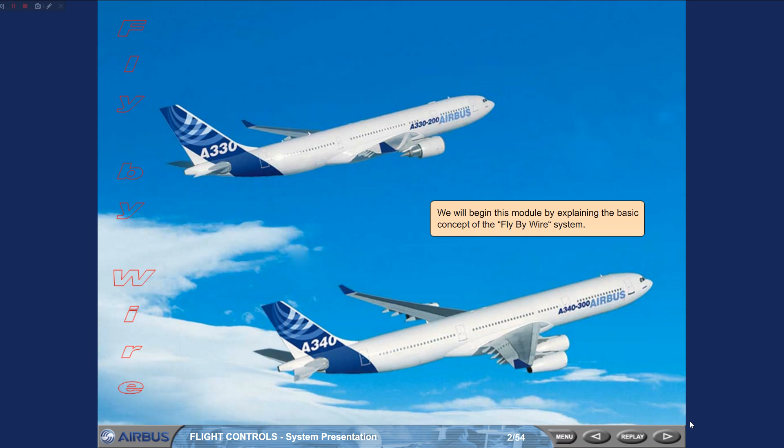In conventional aircraft, the movement of the control column is transferred along cables and pulleys until it reaches the control surface to be moved. In the A330 A340 family, the cables and pulleys have been replaced by electrical wires. This has the advantage of saving weight on the aircraft. However, there are even greater advantages, as the video clip will demonstrate.

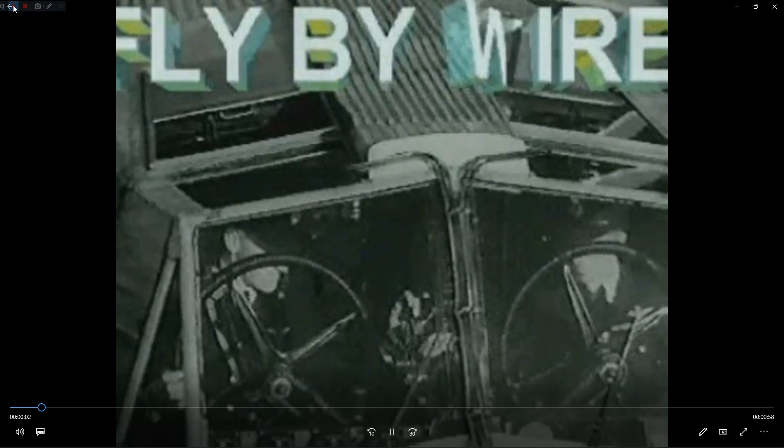Now the way became clear to reassess the mechanical linkages, transferring the control commands to the electrically actuated hydraulic motors that work the flying surfaces.

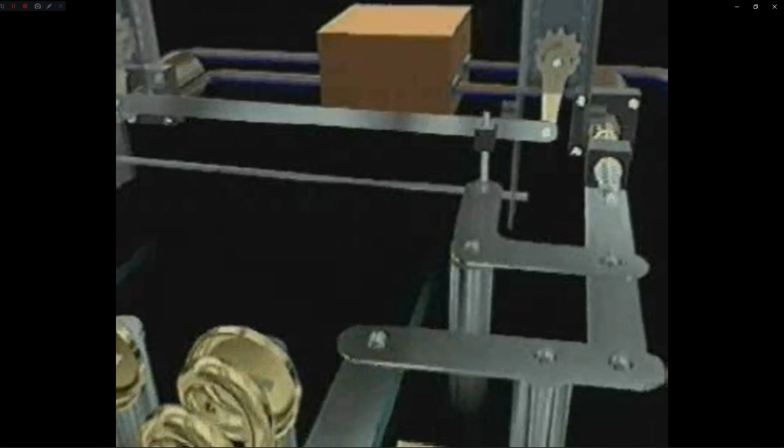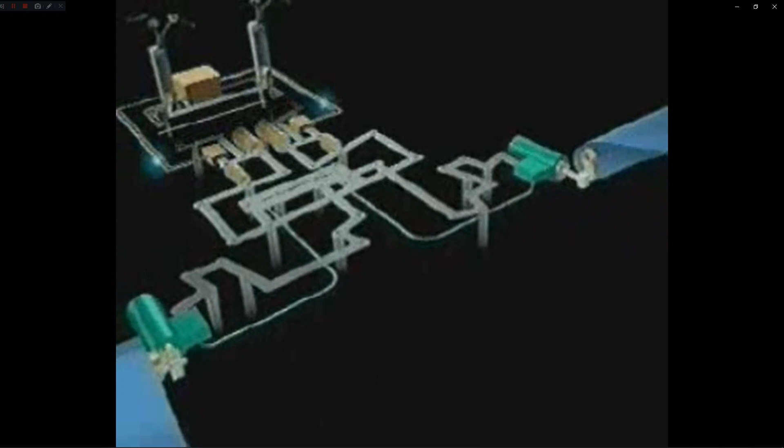As electrical signals were already being used to control the motors, the logical step now was to send the message to them direct from the control column by electrical wire, resulting in a far simpler and lighter system. And without the need to exert muscle power, the conventional control yokes could be replaced by small side sticks.

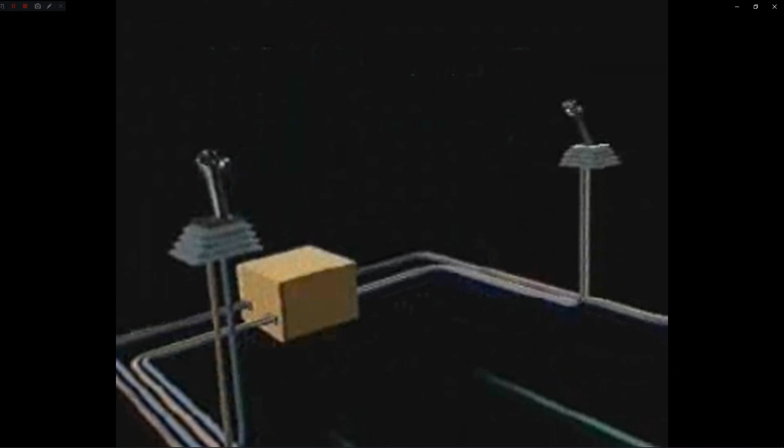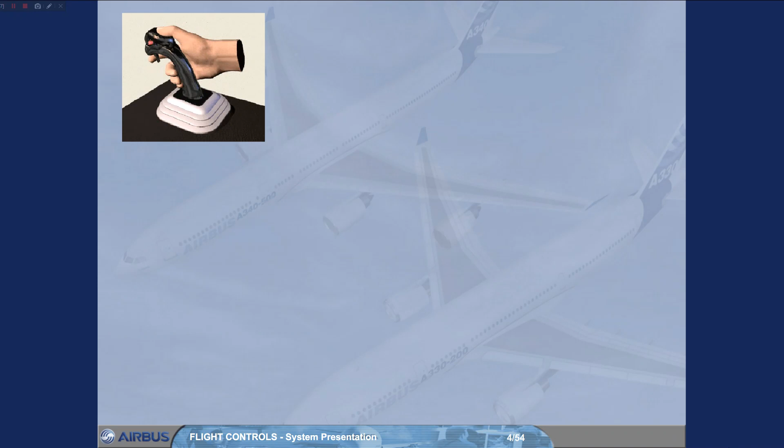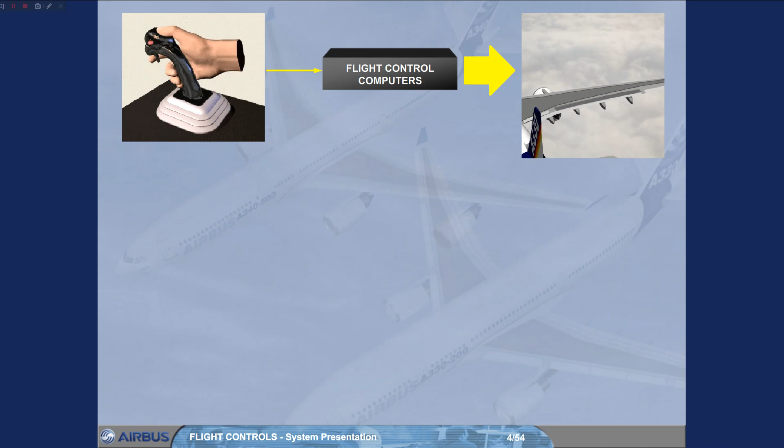The electrical signals, created by side stick movement, travel through flight control computers before being transmitted to the surface hydraulic actuators, also named servo controls. These computers analyze the signal to check that it is a safe command and ensure the optimum flight control surface deflection for the demand.

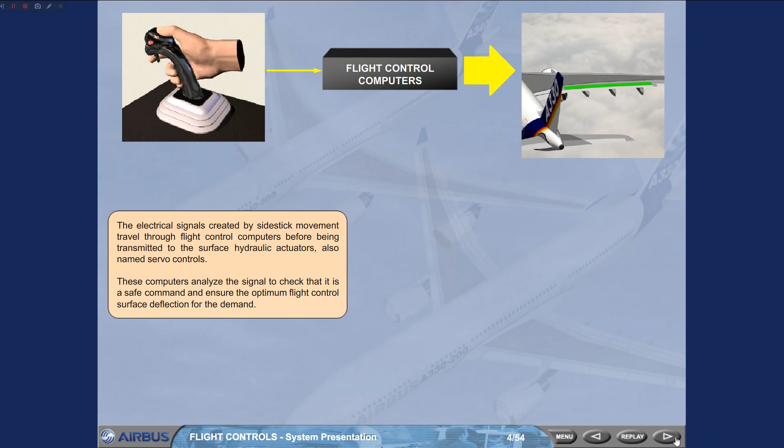This has advantages over conventional systems. It makes the aircraft extremely stable, enhances safety, reduces the workload of the pilot.

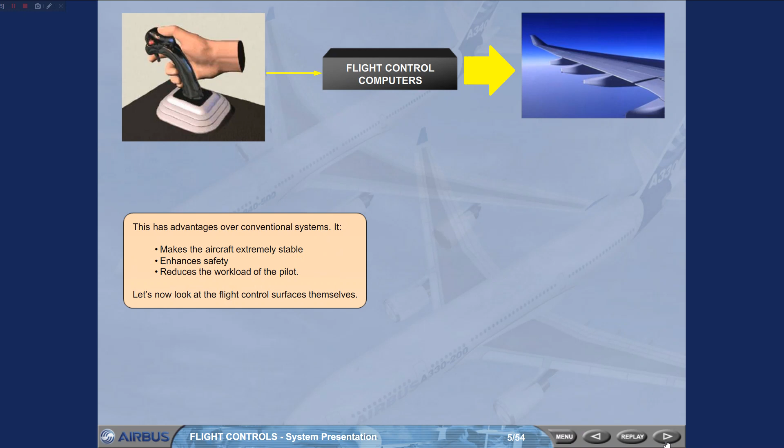Let's now look at the flight control surfaces themselves. The flight control system includes ailerons, elevators, a trimmable horizontal stabilizer, THS, for pitch trim, a rudder, ground spoilers, speed brakes.

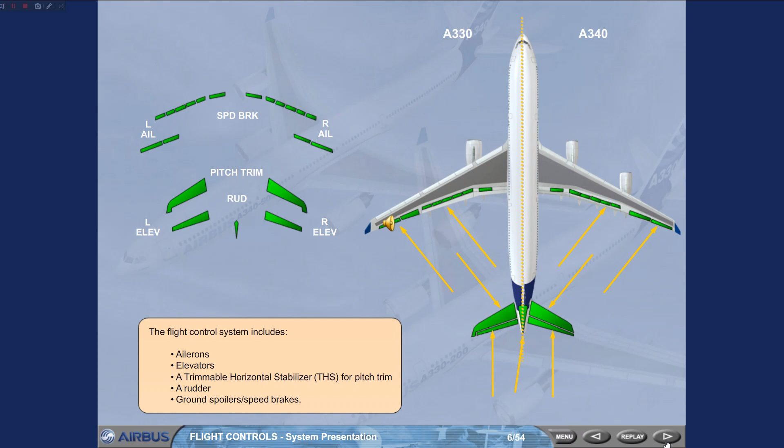Now let's introduce the ECAM flight control page. You can see that all the flight control surfaces we have talked about are displayed. We will now see them in more detail.

The movements of both ailerons and both elevators are symbolized by a green index moving in front of a white scale.

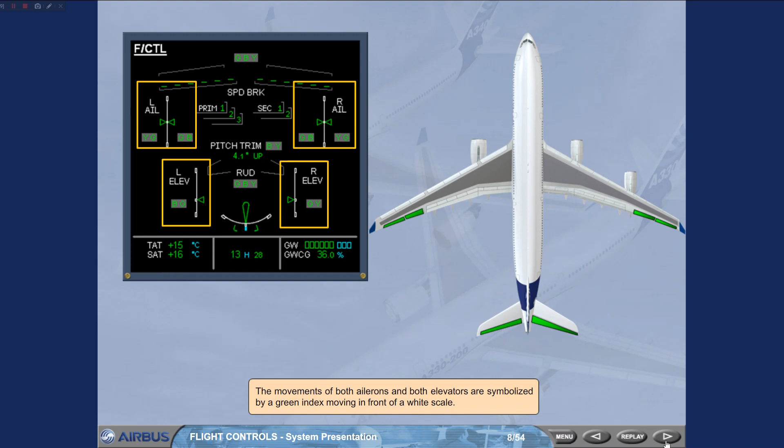The green rudder symbol is used as an index to display the movements of the rudder on a white scale. The rudder trim is indicated by a small blue line below the scale.

Note that the rudder and the pedal deflections are limited as a function of speed via a rudder travel limiter. The high-speed position is indicated by small green lines on the rudder scale.

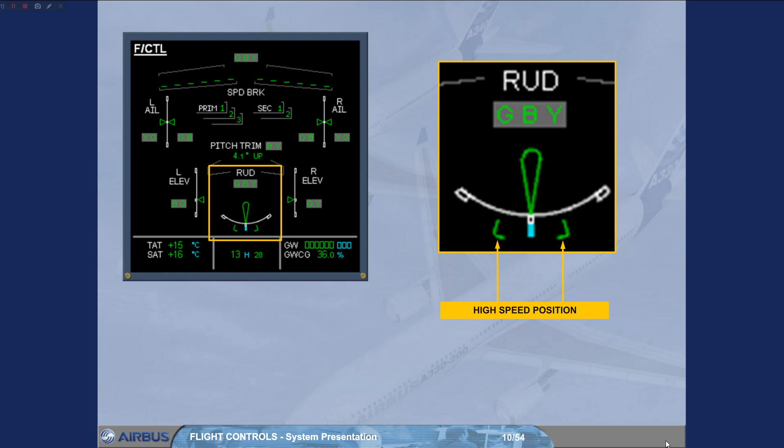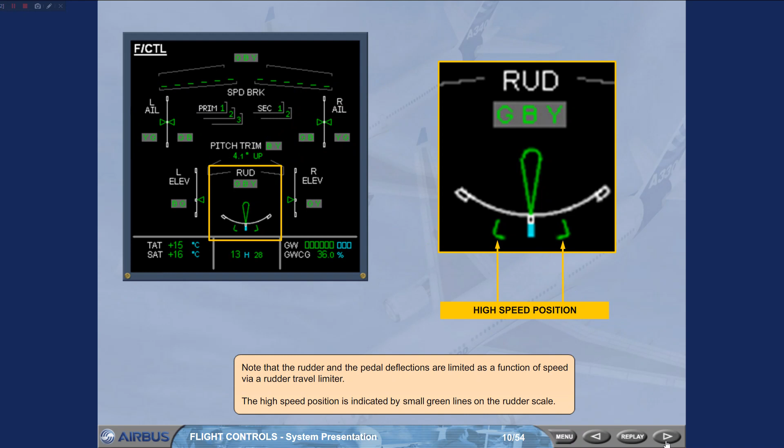The pitch trim position is indicated by trimmable horizontal stabilizer deflection in degrees up or down.

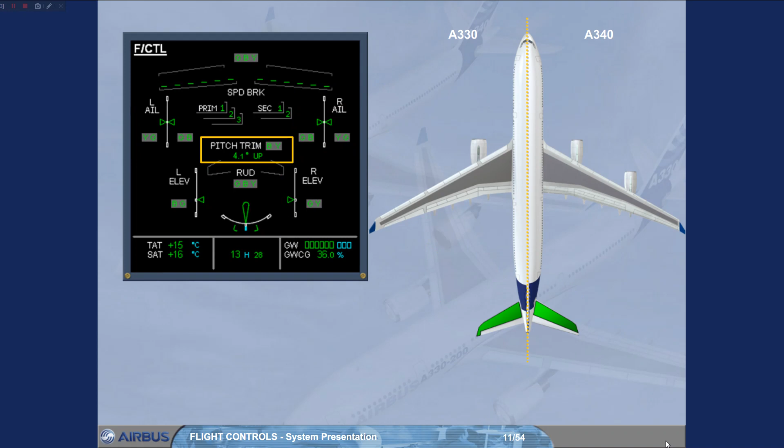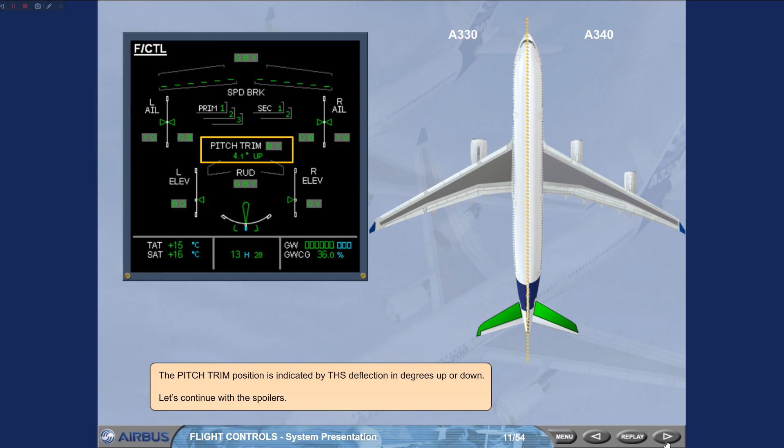Let's continue with the spoilers. The spoilers have several functions. Speed brakes use all the spoilers.

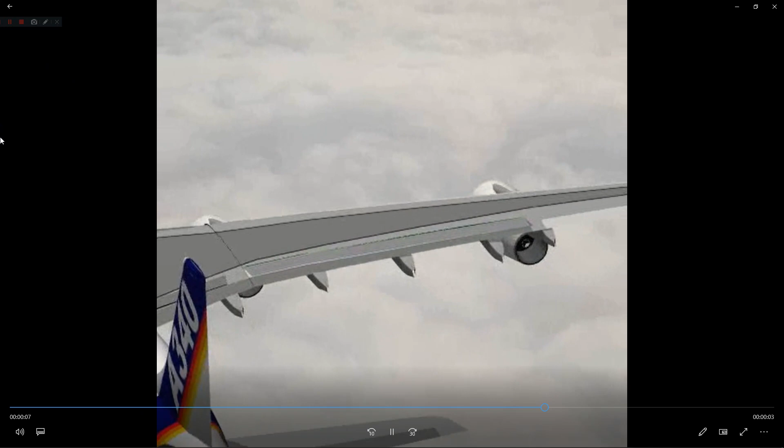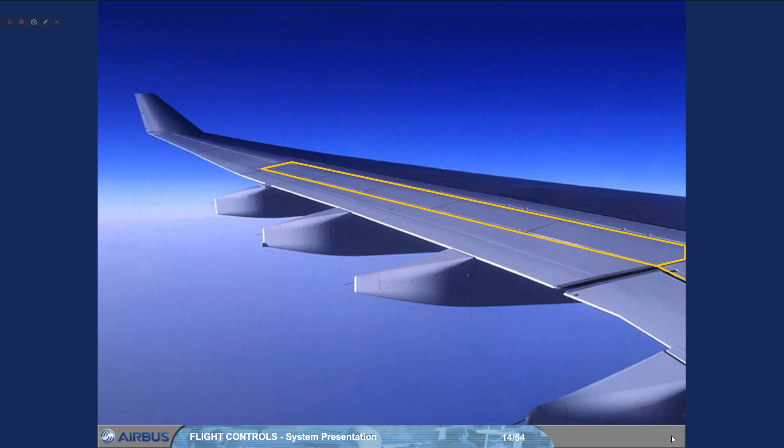Ground spoilers use all surfaces.

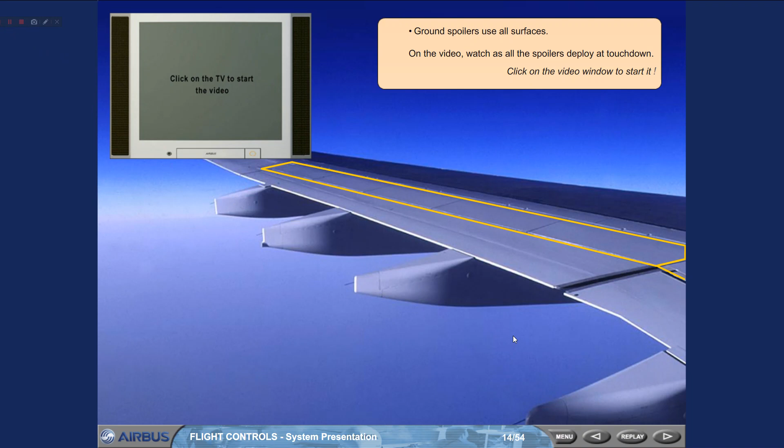On the ECAM flight controls page, the spoiler extended position is indicated by small arrows. This is the case of the speed brakes.

Now, we will look at the flight control computers. The movements of the flight control surfaces are managed by 5 computers. These are 3 primary computers, PRIM, and 2 secondary computers, SEC.

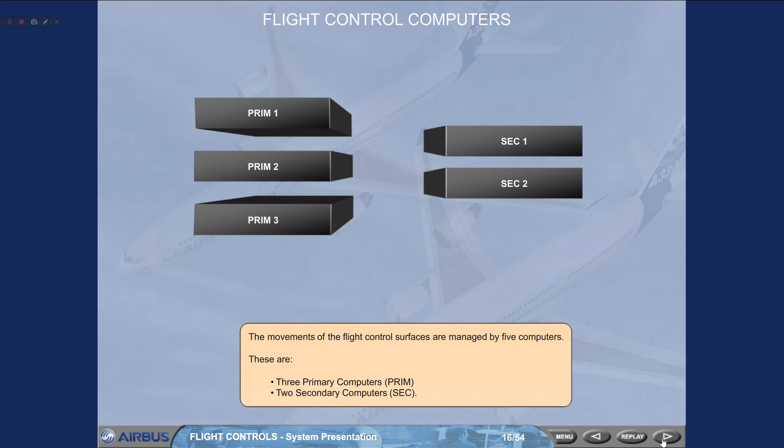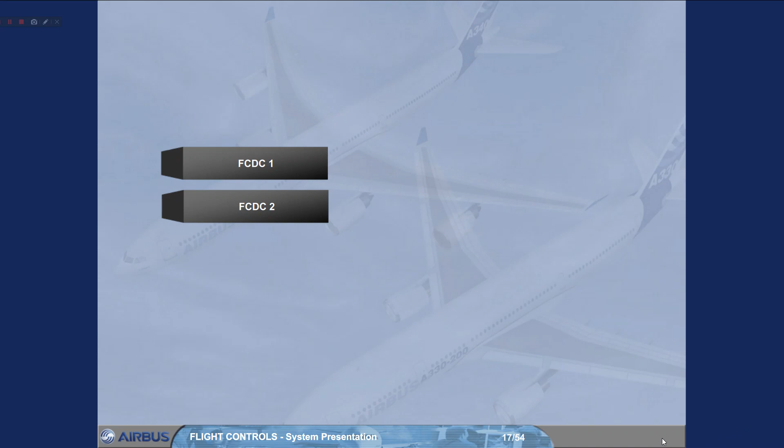In addition, 2 flight control data concentrator computers, FCDC, are used to acquire data from the PRIM and SEC. Then, they send it to the EIS.

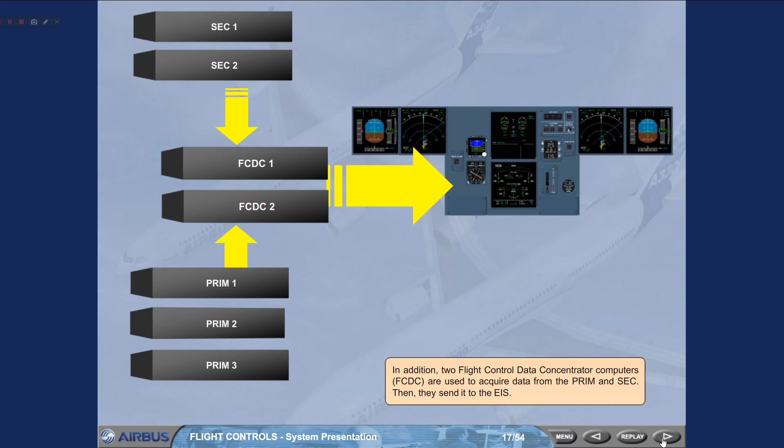The status of PRIM and SEC is indicated on the ECAM flight controls page. The other computers are not displayed.

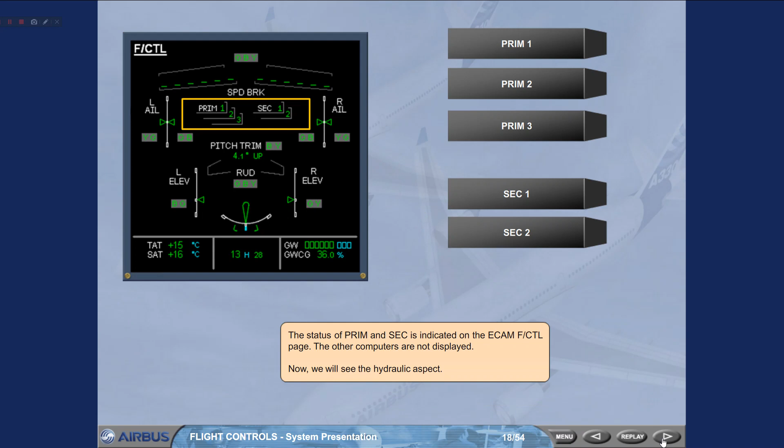Now, we will see the hydraulic aspect. Three independent hydraulic systems are used to power all the flight control surfaces.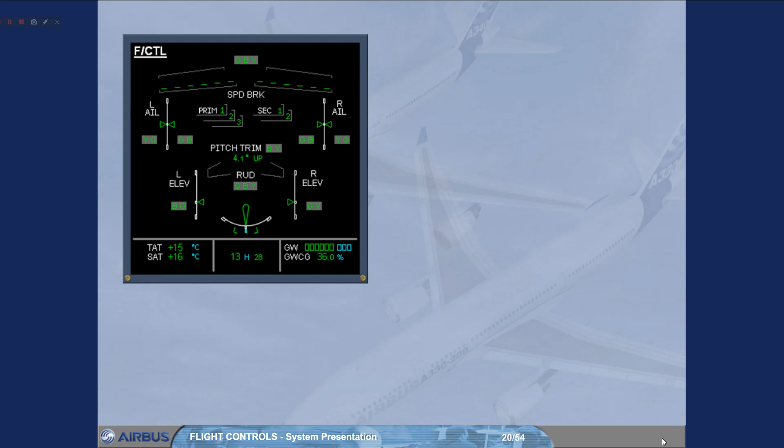The hydraulic systems which actuate each control surface are indicated on the ECAM flight control page by the use of G, B and Y. For example, the rudder is powered by the green, blue and yellow hydraulic systems. The ECAM flight control page is now complete.

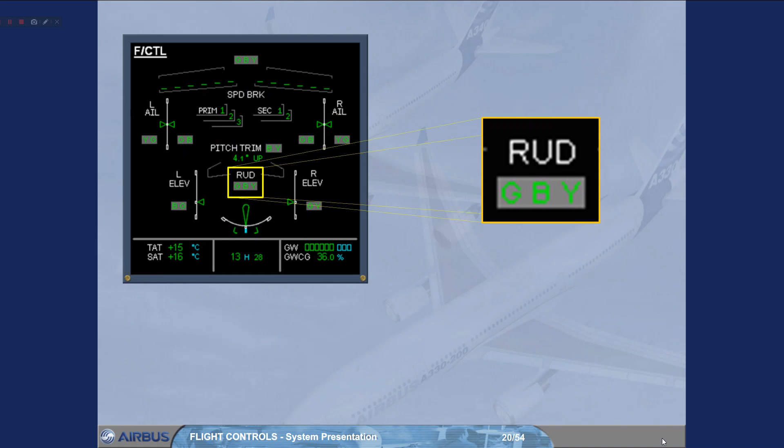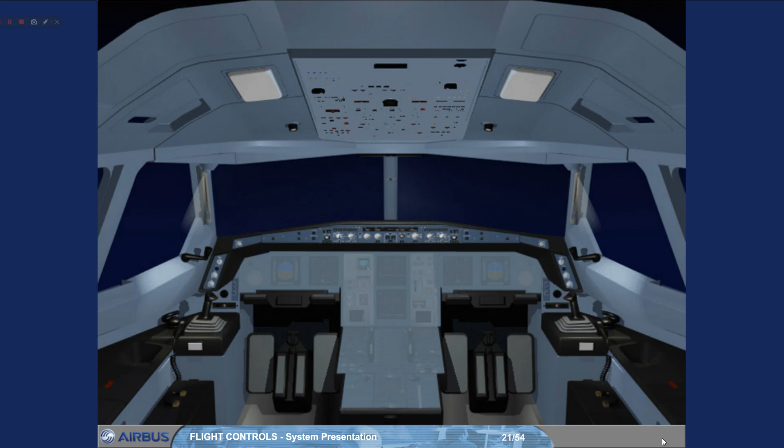Pilots control pitch and roll through 2 side sticks. There are related side stick priority lights. Side sticks and priority lights will be explained in a separate module.

Pitch trim wheels are located on the center pedestal. There are 2 sets of conventional rudder pedals.

A rudder trim panel is located on the pedestal. A speed brake lever is located on the left side of the pedestal. In addition, there are two panels located on the overhead panel to control the flight control computers.

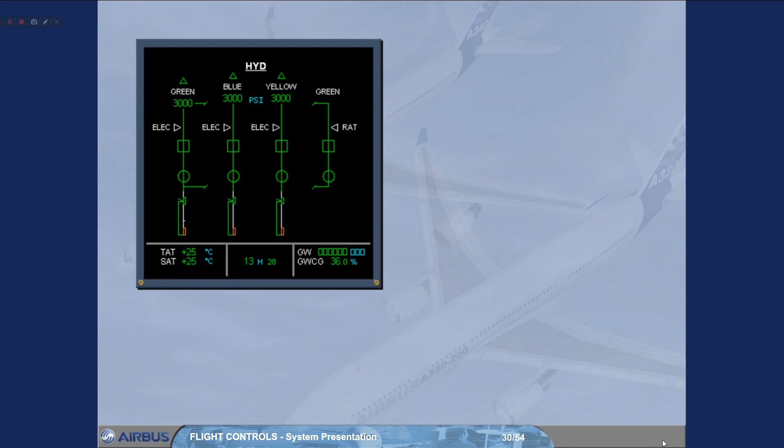The slats and flaps are hydraulically actuated like all the other surfaces. They are electrically controlled via 2 slat flap control computers, SFCC.

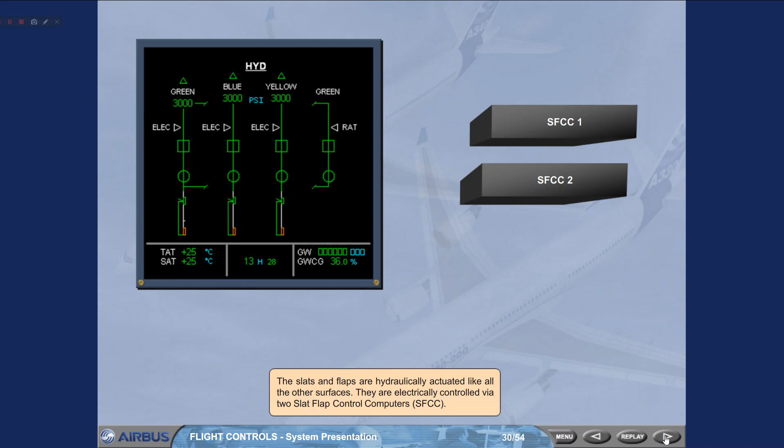Each SFCC has 2 channels, one for the flaps and one for the slats. Each channel can drive its associated surfaces.

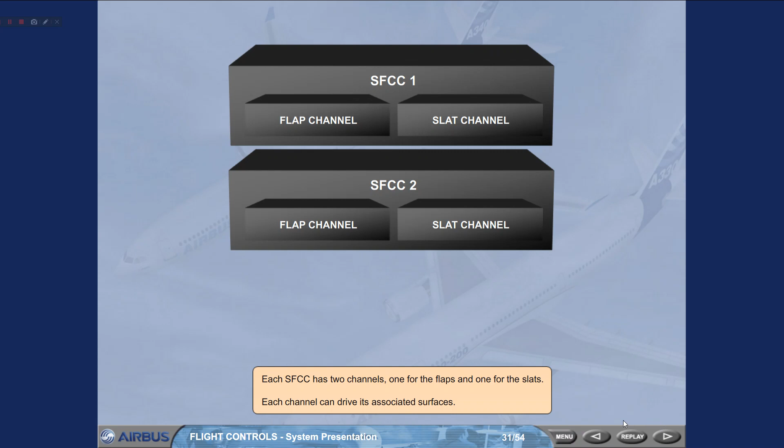The flap lever located on the right side of the pedestal operates the slats and flaps. The flap lever has the following positions: 0, 1, 2, 3 and FULL.

The slats and flaps have protection functions. In particular, surface asymmetry between left and right wing, surface attachment failure, overspeed or uncommanded movement are detected. All these protections will be studied later.

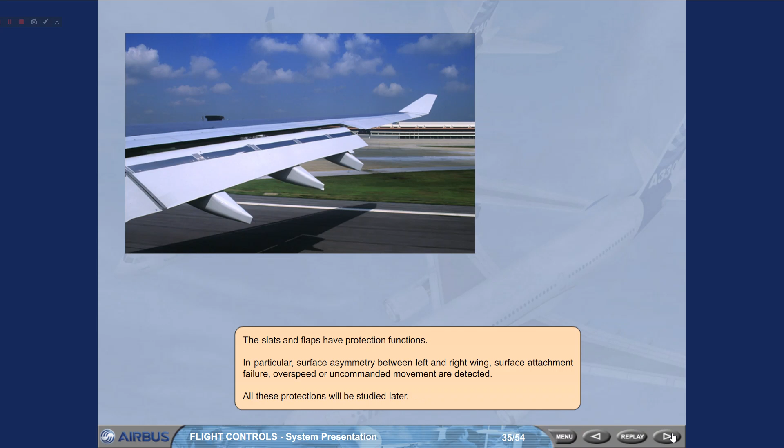Let's review some operational indications. The pitch trim values related to the takeoff CG values are indicated on the scales beside the trim wheels.

After engines start, when the 3 hydraulic systems are available, the takeoff trim is automatically set, calculated by the PRIM, according to the zero fuel weight CG entered in the MCDU, and the fuel distribution. The takeoff trim setting must remain in the takeoff green band range.

Note, on the A340, the takeoff trim is manually set according to the CG.

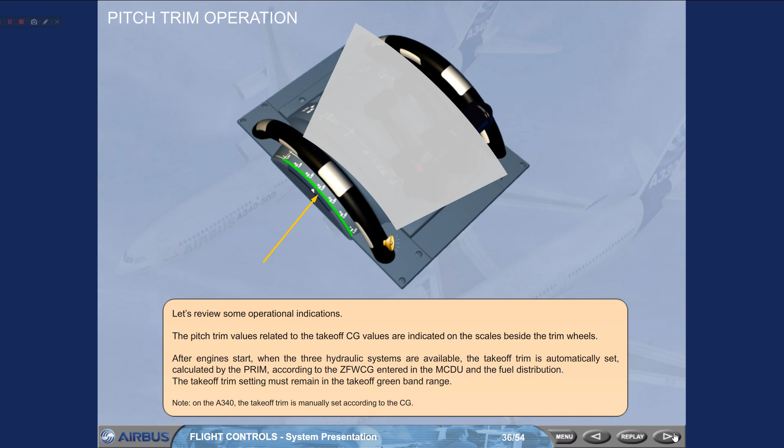The pitch trim position set may be seen on the ECAM flight control page during the flight control check when taxiing, if required.

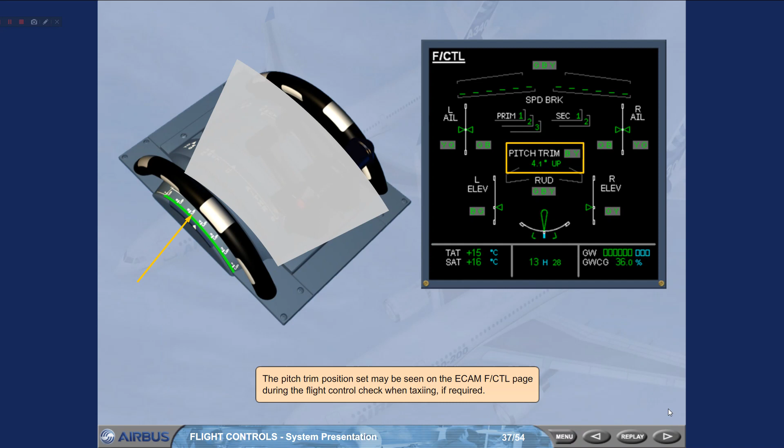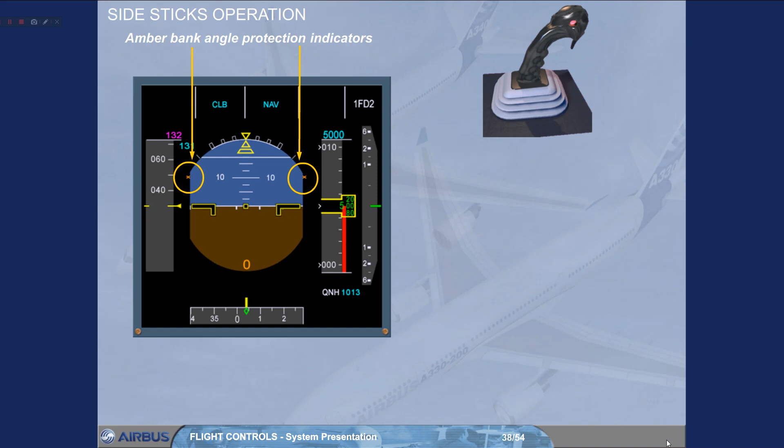Notice that without hydraulic pressure, the bank angle protection indicators are displayed in amber on the PFD. The side sticks are inoperative because there is no hydraulic power. Moving the side sticks will not affect the control surfaces.

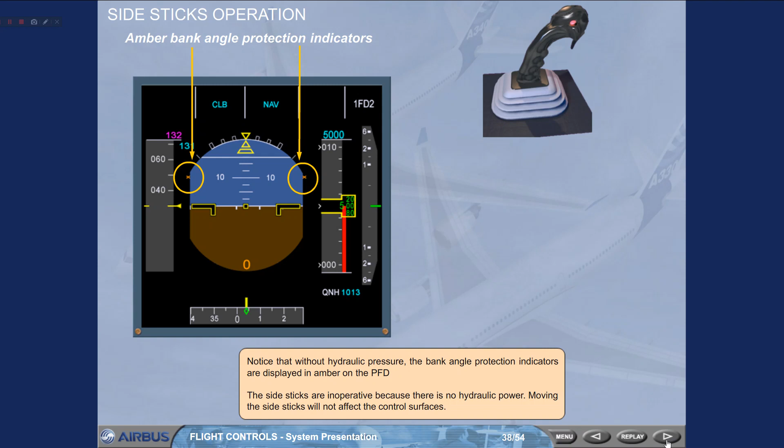After first engine start, as soon as hydraulic power is available, the green bank angle protection indicators appear, indicating normal law. The side sticks become operable.

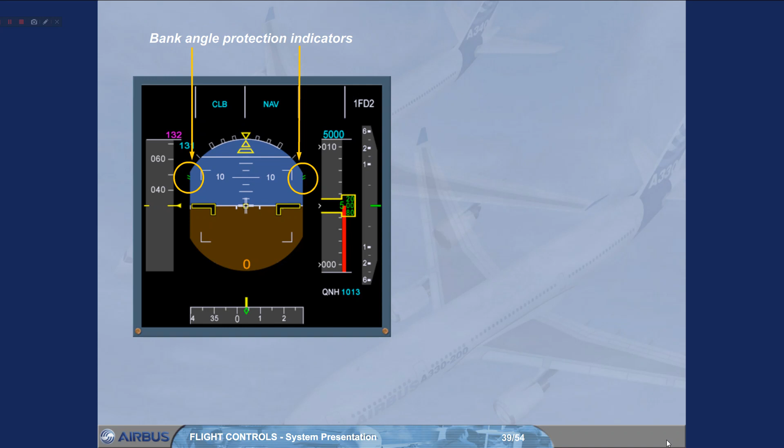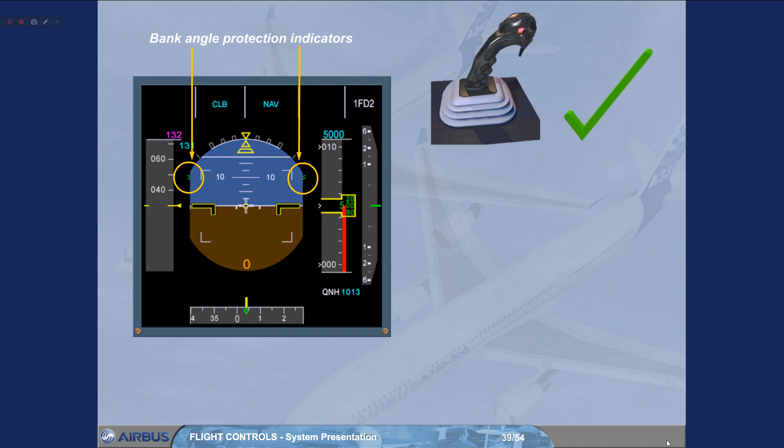On ground, the control surfaces respond in direct relationship to movements of the side sticks. This ground mode enables pilots to check the flight controls. Note: a rudder pedals disc button is provided on the nose wheel steering handle to prevent any unwanted steering inputs during rudder pedals test.

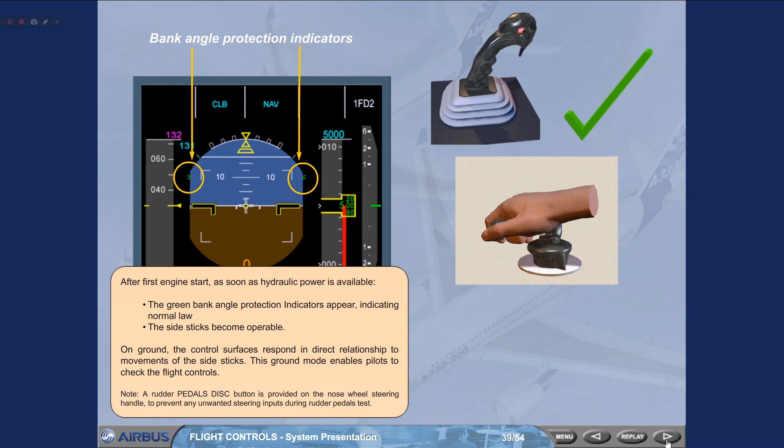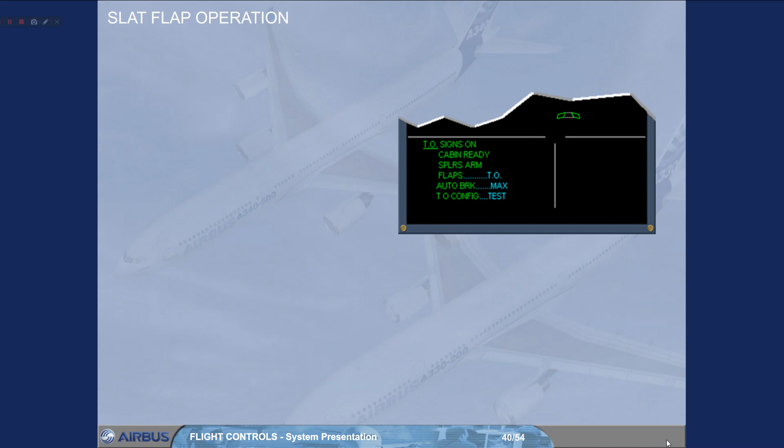The takeoff memo is normally checked during taxiing. For training purposes, we have displayed it now. The flaps should be set to their takeoff position, 1 plus F, 2 or 3.

While the flaps are deploying, we will be looking at their indications on the engine warning display. To set the flaps, you need to lift up the lower part of the flap lever and then position it to the appropriate setting. Here, as an example, we will select flap 3.

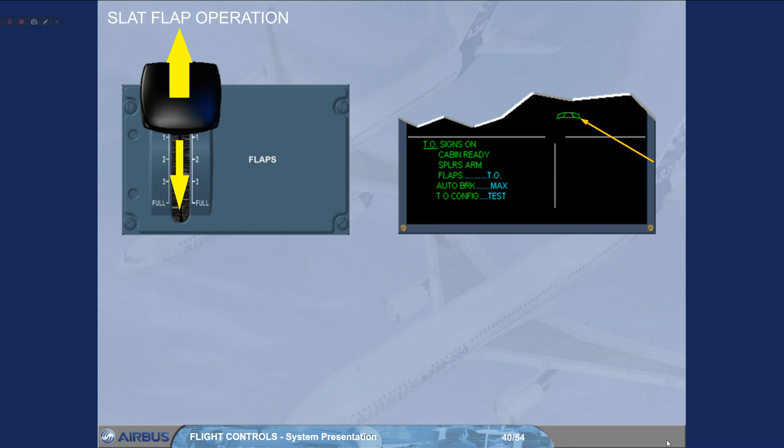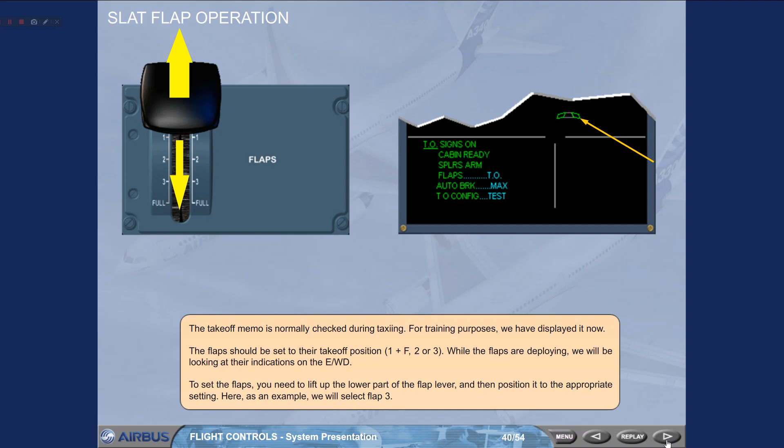As soon as a flap selection is made, blue markers appear on the engine warning display to show the selected flap and slat positions. A blue number shows which flap position has been selected, here 3. The word flap appears in blue. The current slat position green markers move, followed by the flap. The white labels S and F appear.

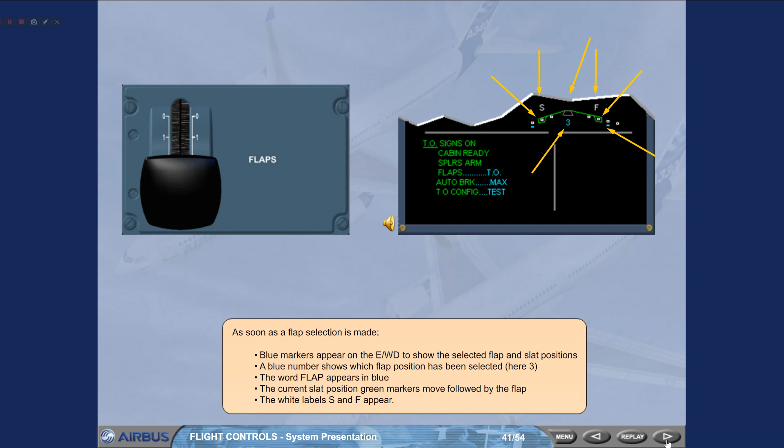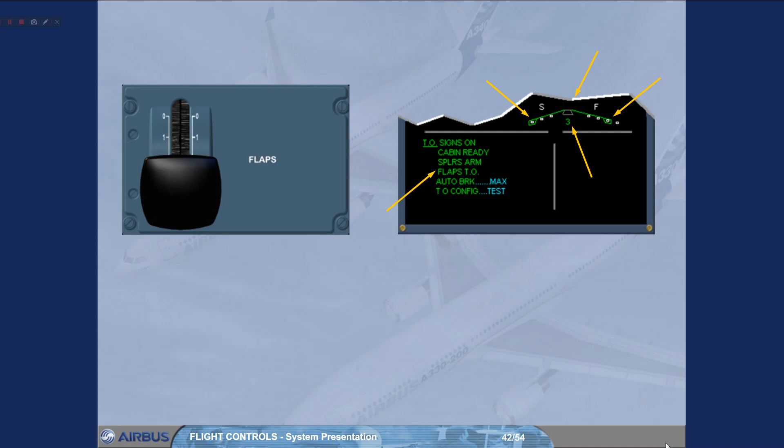When the flaps and slats have reached the selected positions, all position indications turn from blue to green. The word flap changes from blue to white. The flap's takeoff memo on the engine warning display turns to green. Note: on the A340, there are only 2 slats positions versus 3 on the A330, shown here.

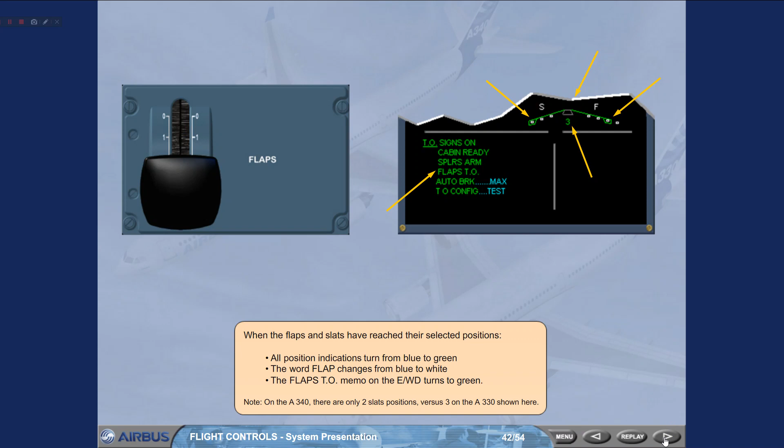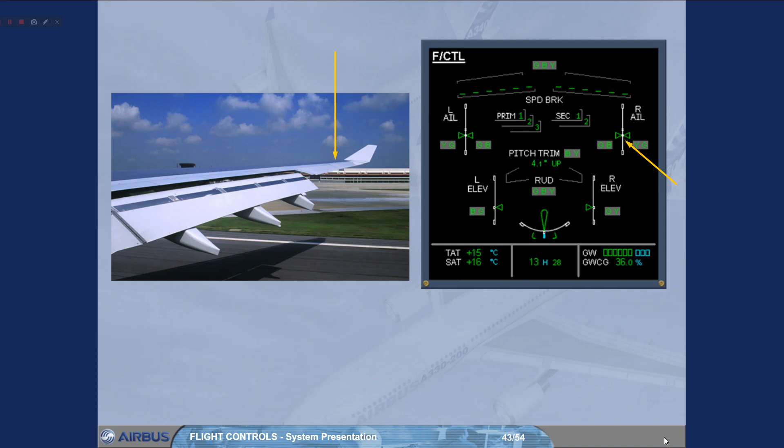When the flaps are extended, the ailerons are dropped by about 5 degrees in order to increase lift. The aileron indexes are now pointing to a small white square, which represents the new neutral position. Note: on the A330, there is a second aileron droop position about 10 degrees in configuration 2, 3, full.

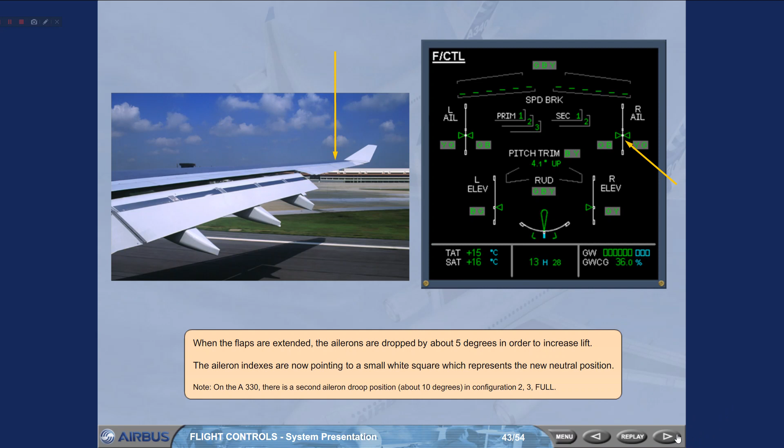We are in flight. Flap 1 is set. Notice both slats and flaps are extended to the first position. This is 1 plus F configuration. The airspeed is increasing through S-speed, minimum speed for slat retraction. Flap 0 would be normally selected at this stage. To demonstrate automatic flap retraction, we will delay this action.

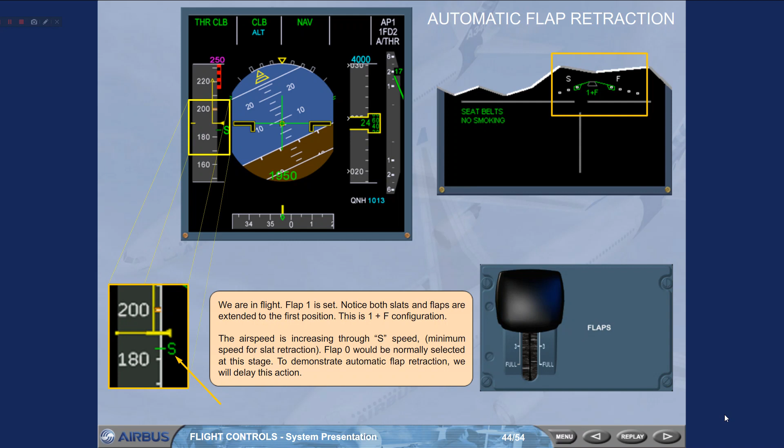As the speed approaches VFE at flap 1 plus F, the flaps will automatically retract fully. This auto retraction speed is higher on the A340-500/600. Please refer to your FCOM for the exact value. Notice the slats remain deployed in their first position. This is configuration 1. There's no automatic retraction of the slats.

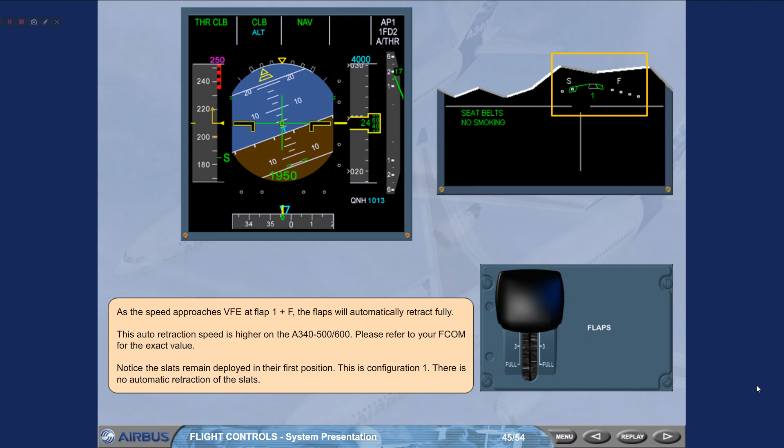In all flap configurations, the speed brake lever can be moved rearwards to any position, depending on the amount of drag required.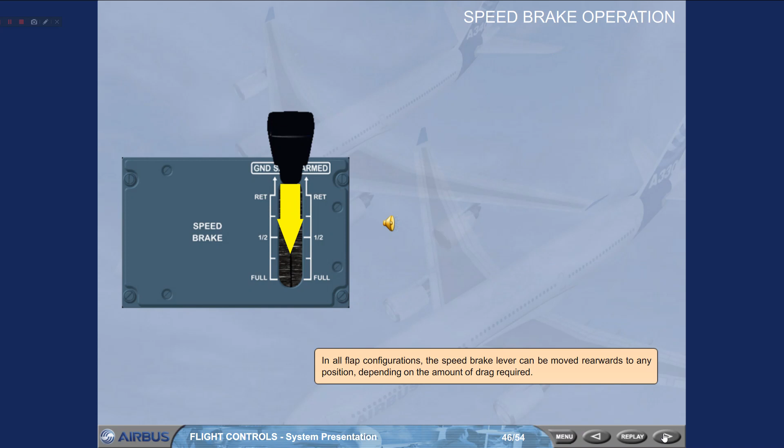For training purposes, we have called the ECAM wheel page for you to remind you of the indications. The indications are also shown on the ECAM flight control page.

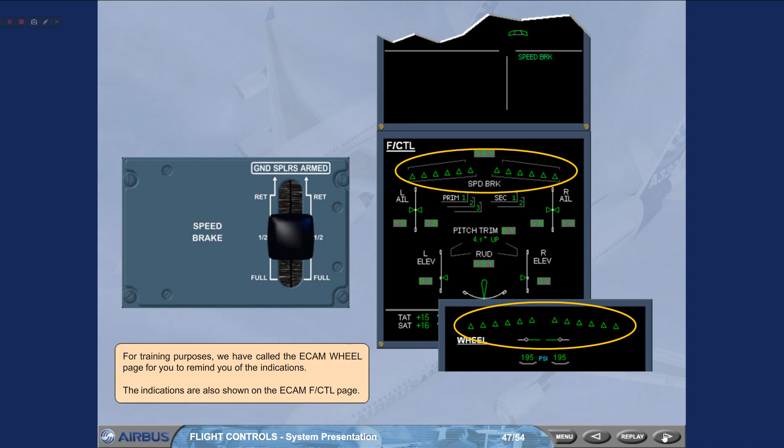We are back to normal display. With some power on at least one engine, the speed brake message will flash amber.

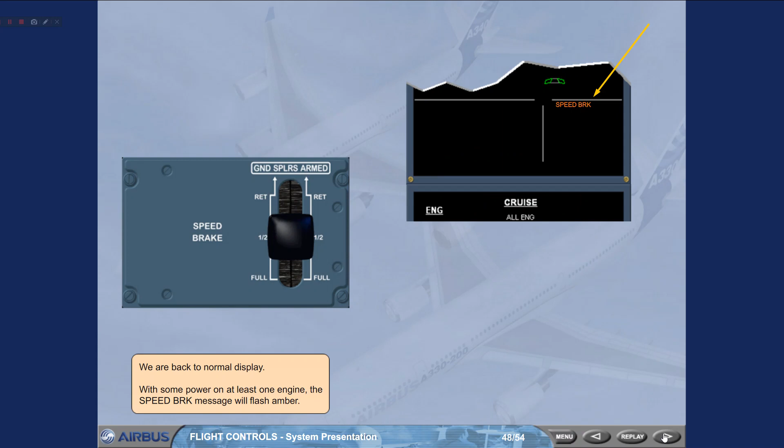We have retracted the spoilers. The spoiler retraction can be confirmed on the engine warning display by the disappearance of the speed brake memo message.

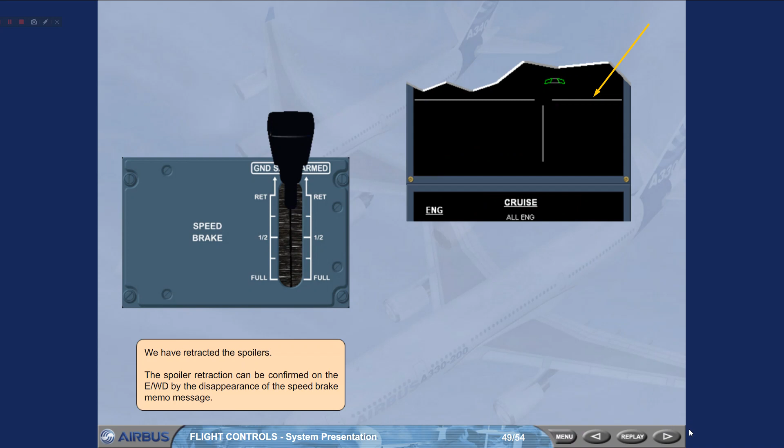We have activated the approach phase. The airspeed decreases below the maximum speed for flap extension, or VFE, shown on the speed tape by amber dashes. We can now select flap 1.

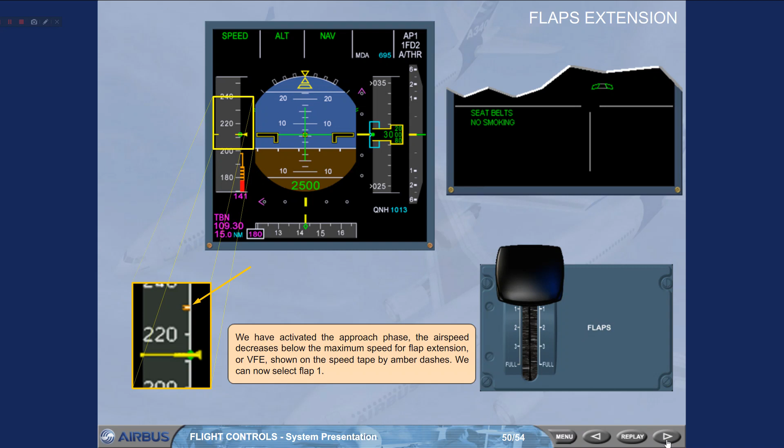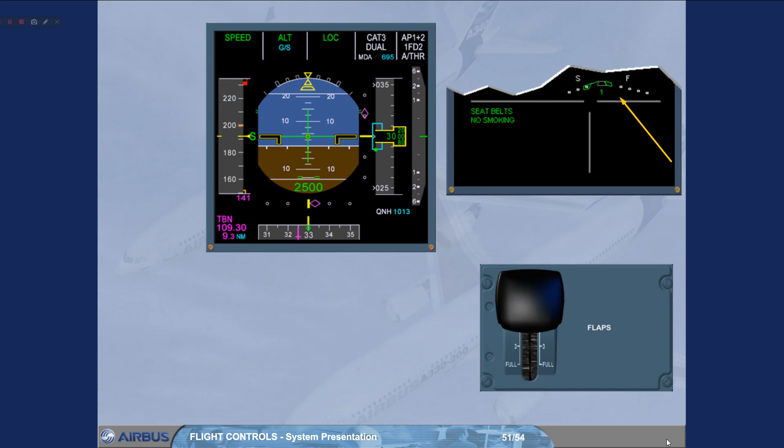Flap 1 is selected. Notice that an airborne selection from flap 0 to flap 1 deploys the slats only. You cannot select flap 1 plus F from flap 0 in the air. The speed has now decelerated to below VFE for flap 2.

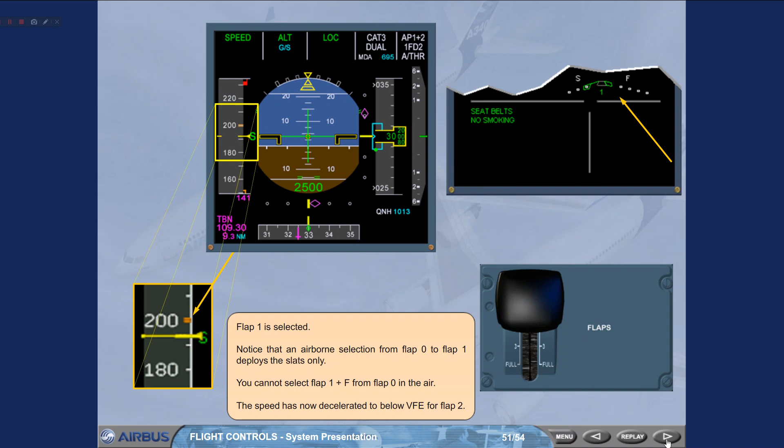During landing, passing 50 feet, a slight pitch-down elevator order is applied, so that the pilot has to move the side stick rearwards to maintain a constant path. Therefore, the pilot has to perform a gentle flare, as for a conventional aircraft.

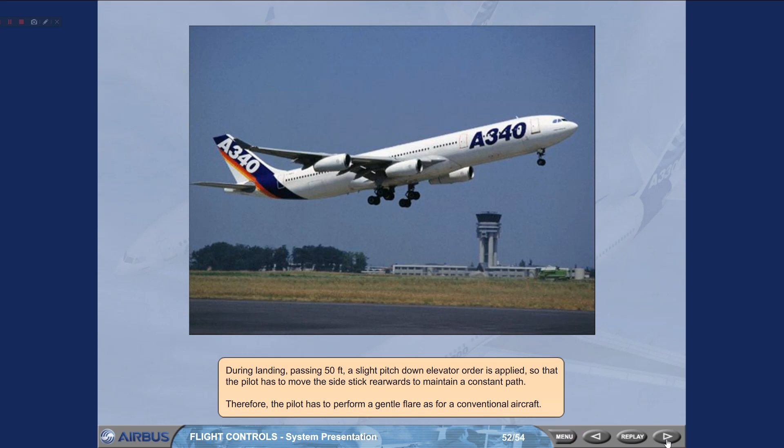Spoiler armed. At touchdown, with the main landing gear compressed, the ground spoilers deploy automatically and operate as lift dumpers if the thrust levers are at idle or reverse. Spoiler extension can be monitored by the pilot non-flying on the ECAM wheel page.

On the A340-600 and 500, ailerons are also used as lift dumpers by deflecting upwards. Note: if only one main landing gear leg is compressed, all ground spoilers will extend partially, thereby decreasing the lift and compressing both main landing gear legs. Ground spoilers will then fully deploy.

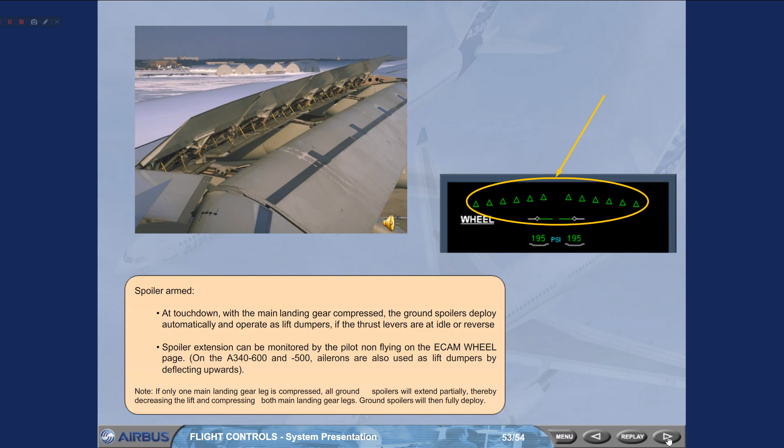If a go-around is done, the ground spoilers will automatically retract when the power is applied.